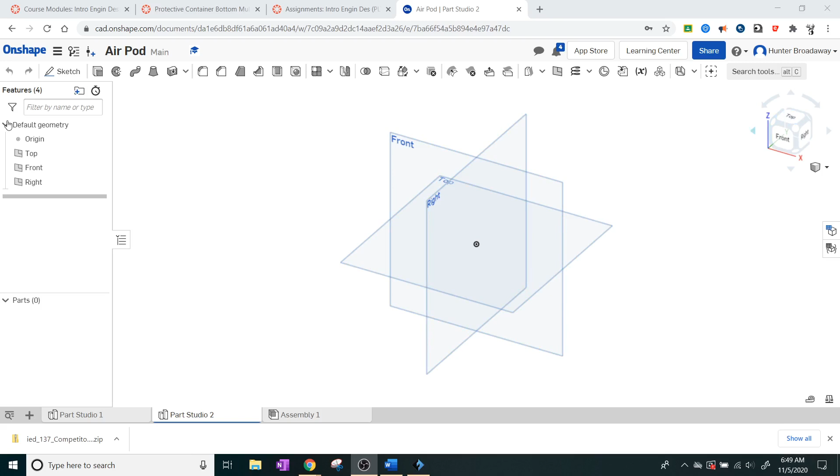It's going to be really simple and straightforward, not meant to be super complicated. So here we go. We're going to click Sketch and click on the top view.

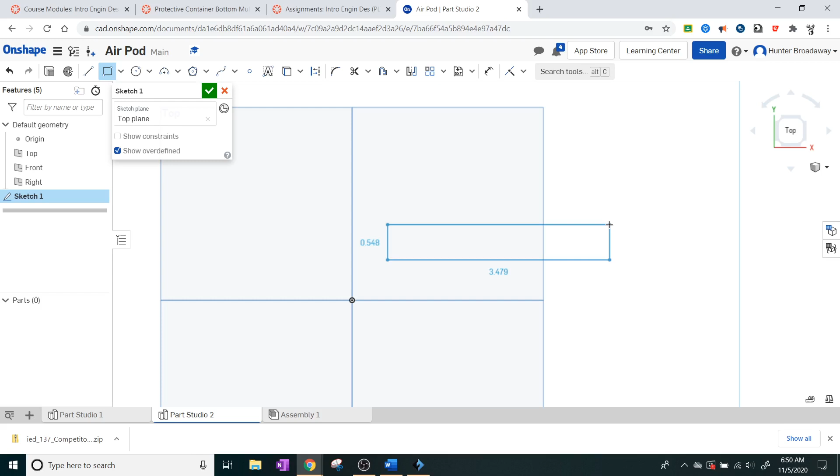Move the view cube to the top, and we're going to make a rectangle. This rectangle is going to be, let's see, we took some dimensions for some AirPods earlier, and it's 1.6 across and 0.652 high. So I'll click here, 1.6 inches across and 0.652 high, and that looks like... oops, nope, that's for the whole thing. Hang on, used the wrong measurement.

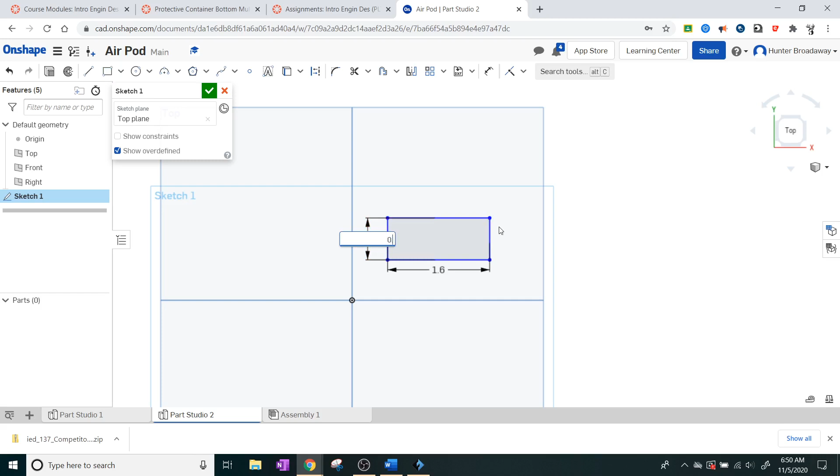That looks a little bit big. The end of the earbuds, so we're going to go 0.25. Let's make this a lot skinnier. There, like that - 0.25 and 1.6.

We're going to finish that sketch, use the extrude button, and extrude upwards another 0.25 inches. Make sure you hit enter and then click the green check mark. This is going to be like the base to our AirBuds, whatever they are - I sound like I'm 65 years old.

The next thing we need to do is add the little sketch component that goes inside the ear. So we're going to click on sketch, click on the top section right here, and make a circle on that object.

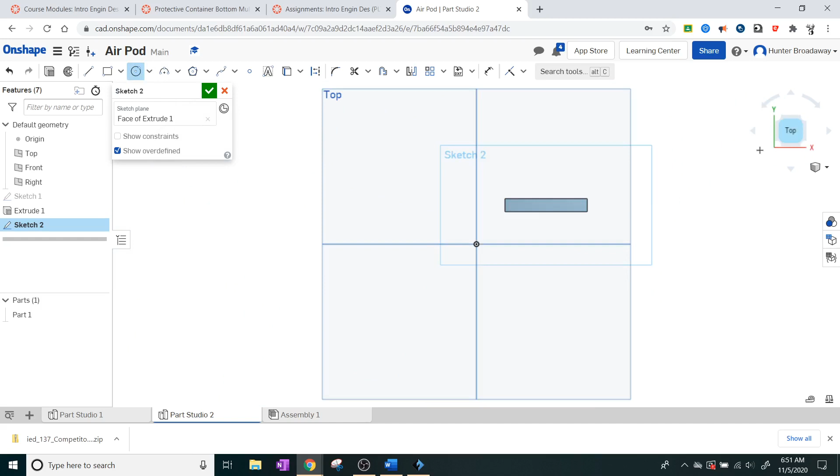Now, keep in mind, you want to try to get in the middle of the circle. The trick you can use with Onshape is move your mouse over to the side that has the geometry you want to put it on, and let's go ahead and say about 3/4 of the way through. It doesn't have to be perfect. Make a circle that goes over to your endpoint and then click.

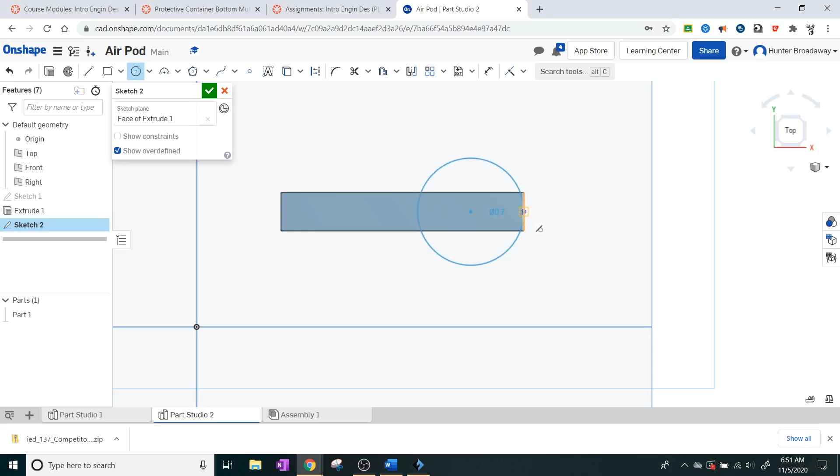For me, it looked like it had a diameter of 0.7. You can just eyeball it. This is meant to be quick, not meant to be a specific version or brand - we're just making some quick measurements from class.

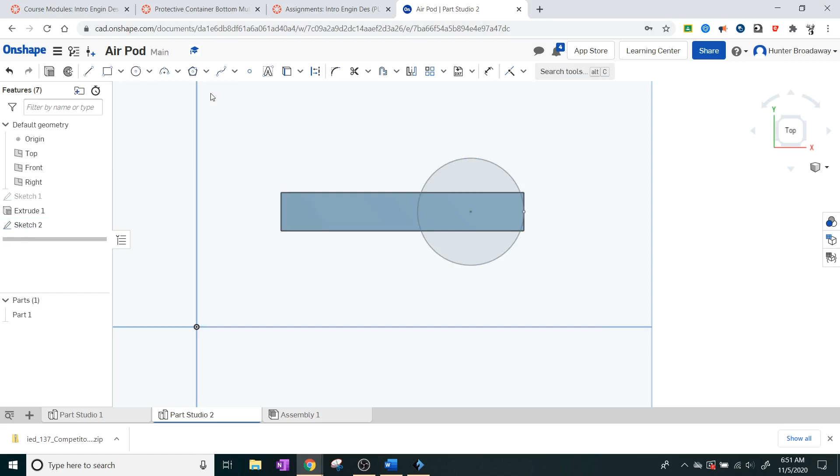All right, and then we're going to make a smaller circle up on top, but there's nowhere to actually make that sketch. So let's go ahead and extrude a little bit on this. I'm going to finish the sketch, go to the 3D mode, and extrude just a little bit.

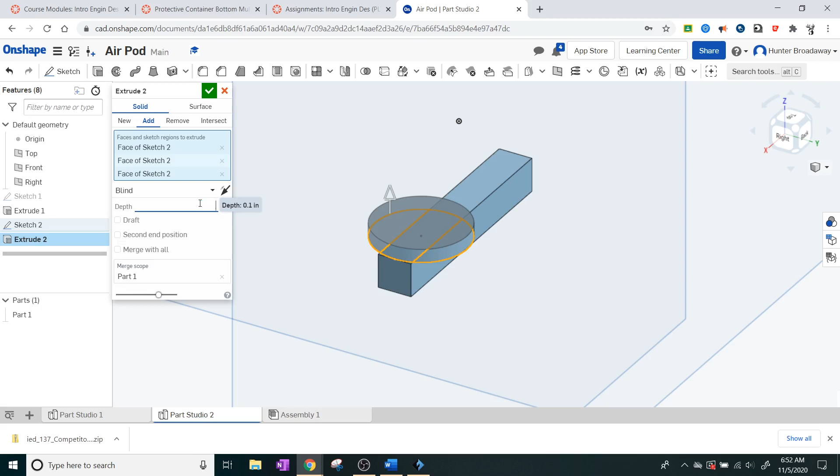All right, now we want to move this surface up. We've got a couple of other options to kind of make this rounded. We could use the fillet, but the fillet's probably a little too round, to be honest. The thing I'm going to use is the loft command - I think that's going to work out really well for us. It looks over here like the volcano.

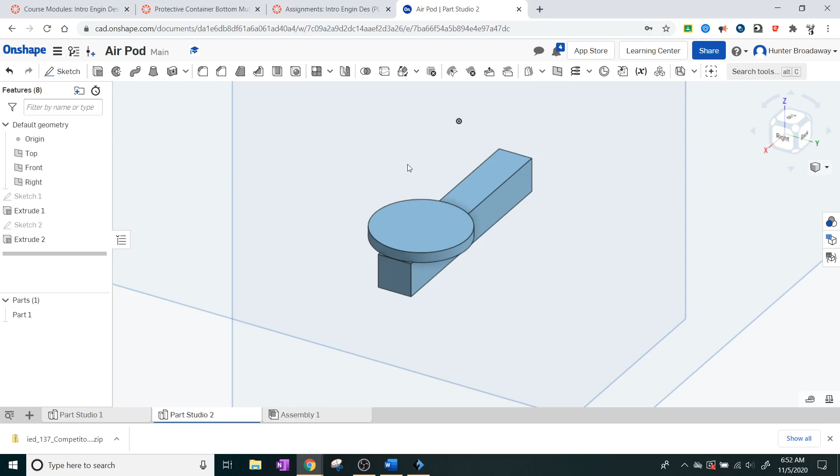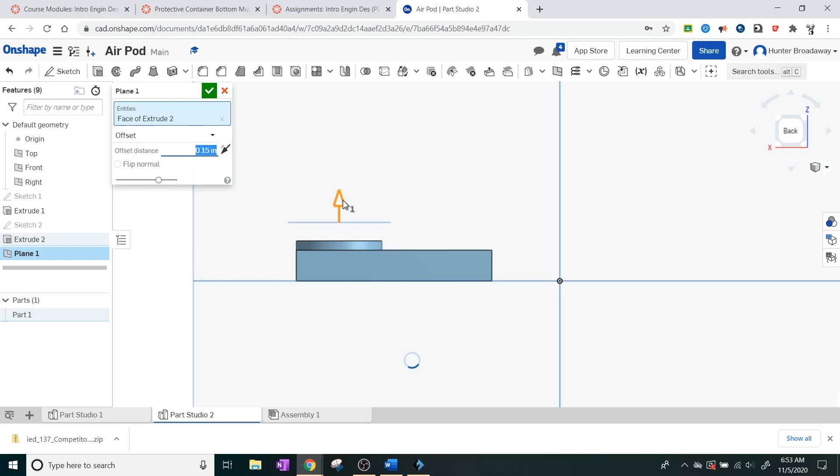So we're going to click on the plane button. I'm going to click on this top part right here and move over to a side view. I'm going to move this plane down to where it looks like I can get these earbuds to kind of bow out, where it's going to look like it can be stuck in your ear. So, I don't know, looks like about 0.15 inches - that seems reasonable.

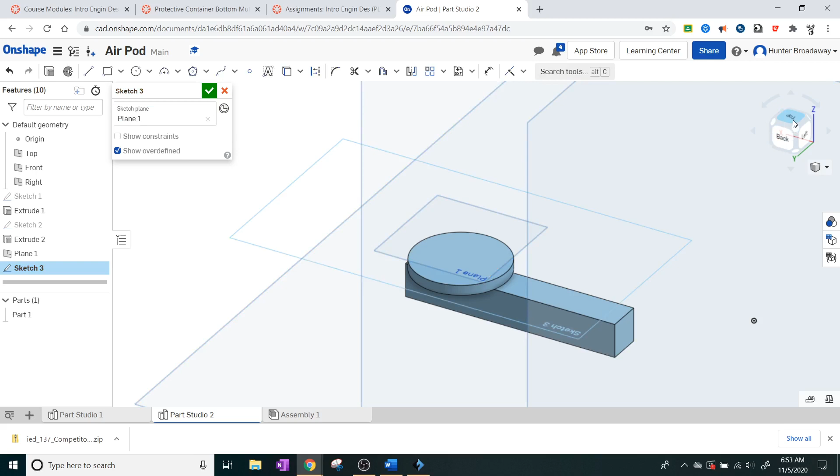So I'm going to click the green check mark, and I should have a drawing plane right there. I can use this to put my sketch on because there's nothing there for me to base it on - I need something there to start my sketch. So I'm going to click sketch, click on plane 1, and put a circle there, and it might help to project my geometry, because right now if I try to make a circle, it's not going to show the middle of the circle and it's not going to snap to any geometry.

So I'm going to click on this box right here that says project convert, and click on the circle, and then click right on the middle. Let's go about 0.3 inches. I'm going to click here and type in 0.3. We can always modify this and see if it looks a little bit better or different.

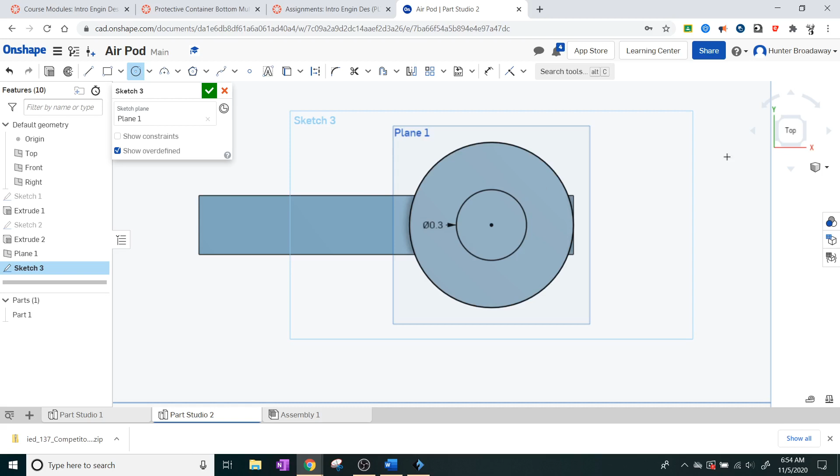So I'm going to click there, go to the top view. You can see how I've got like a little bitty circle right here. We're going to go loft, so I'm going to finish my sketch, click on the loft button, and click on this bottom circle, and then on the top thin circle, and it should loft into place.

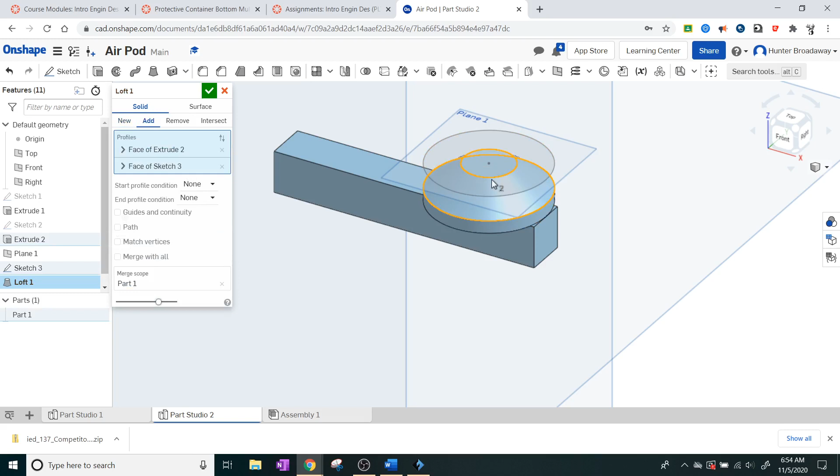There we go, and see how it looks a lot different. Click the green check mark. See how it looks a lot different from a fillet? So these things are going to fill it in place.

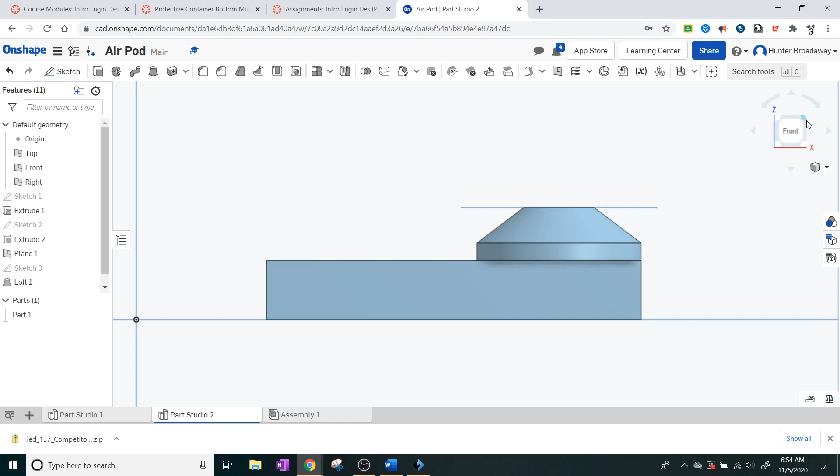Now, from the way that I did it, it kind of looks like you could just use a chamfer instead too. So if you wanted to play around with the chamfer commands, you could easily try to get it to chamfer. But this is not a 45-degree chamfer, so you might have to play with the settings a little bit. I just figured the loft mode was easier.

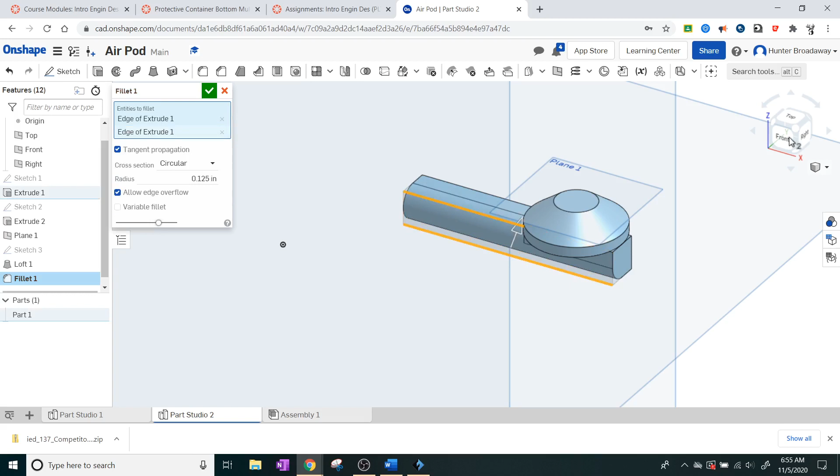Let's get this side over here rounded. Since this is 0.25 by 0.25, I'm going to use the fillet command, and make my radius 0.125. That way, whenever I click on one edge and then the other edge, they're going to round out from each other. So instead of having a rectangle, we're basically going to fillet this down into a circle, like so.

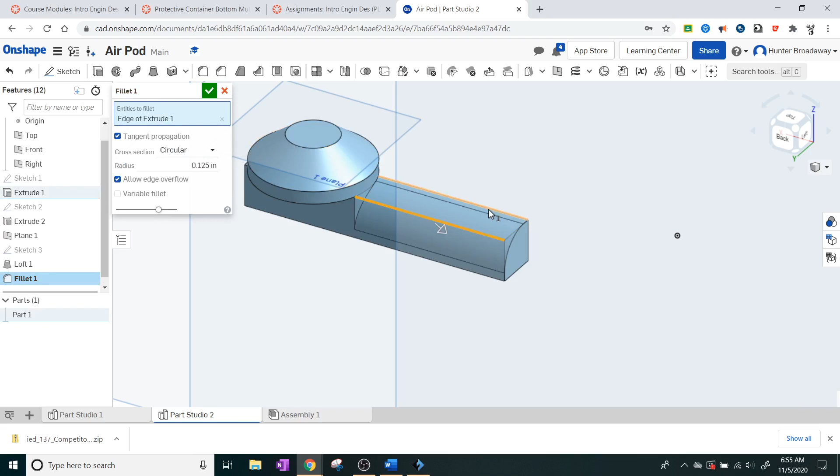And I'm going to probably... let's see here. Yeah, I'm going to go back because I'm going to do one thing specifically for 3D printing. So I'm going to redo this. I'm going to go fillet. The top two are perfectly fine at 0.125, but the bottom two, I actually probably want a little bit of a flat surface so that I can have a flat body to 3D print on the bottom.

So I'm going to try to just fillet these corners over here in the back, make it look rounded. And then at the bottom, I don't want to use 0.125, so I'm going to click the green check mark. I'm going to make that fillet on the bottom a little bit smaller.

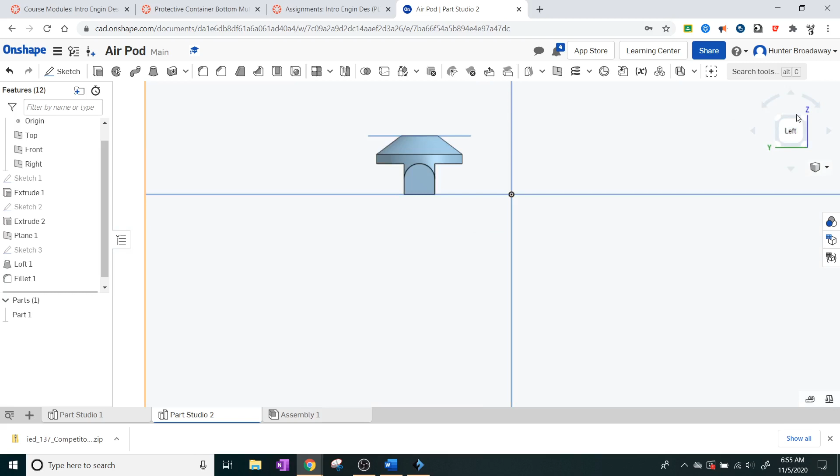So I'm going to move over to this bottom view. I could just 3D print it like this, and I'd need to add some supports over on this side, but that's not going to be too big of a deal. But I could also just add a really small fillet to still give it that roundness, and I think that's what I'm going to end up doing.

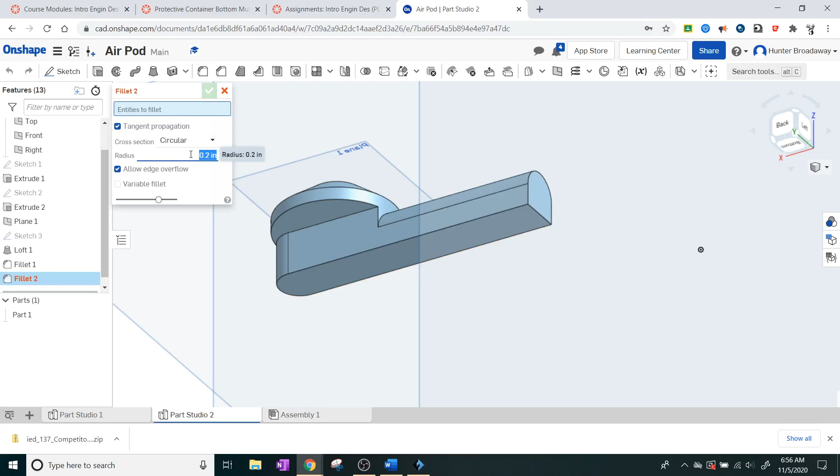So I'm going to click the fillet button, and instead of 0.125, I'm going to just use a 0.1 inch fillet, and let's see what happens. I'm going to kind of experiment with this a little bit. It may tell me no.

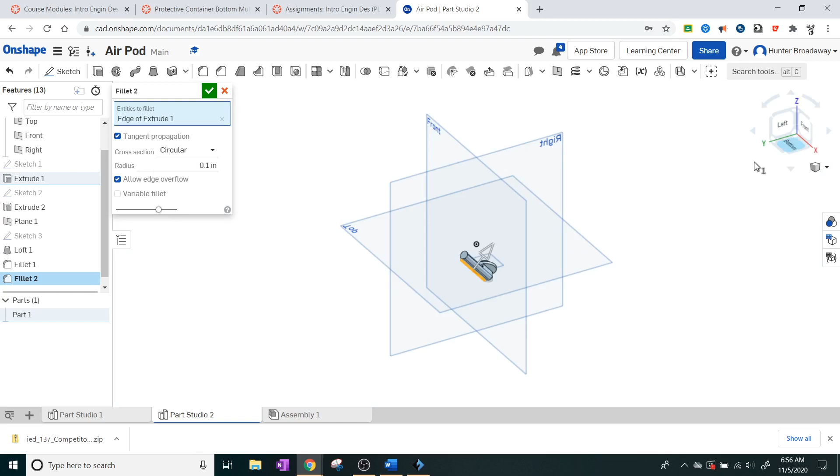It's working, and I'm going to fillet this side over here too. Wait, why did I already fillet that side over there too? Okay, so magic. All right, I guess it filleted all the way around because it thought this bottom part back there was a curve. So this gives me at least a little bit of a flat surface to start my 3D print on.

If it's not enough, I'm going to try it out. If it's not enough, I can always expand or make this fillet here smaller to give me more of a flat surface down here. So here's what I'm going to be printing out.

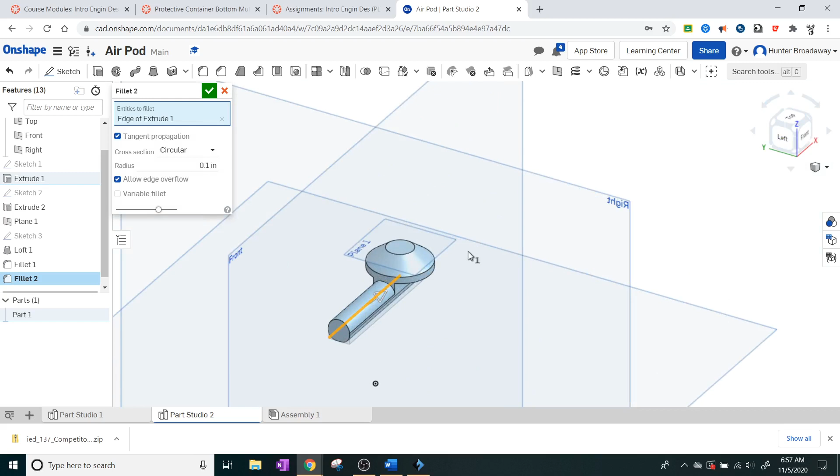So here you go, this is like a little basic earbud. I guess if you wanted to add a little bit more, you could extrude this and then chamfer it around if you wanted to. But I think this gives you the basic idea—if you wanted to take something and stick it inside your protective cases, this would be a good thing.